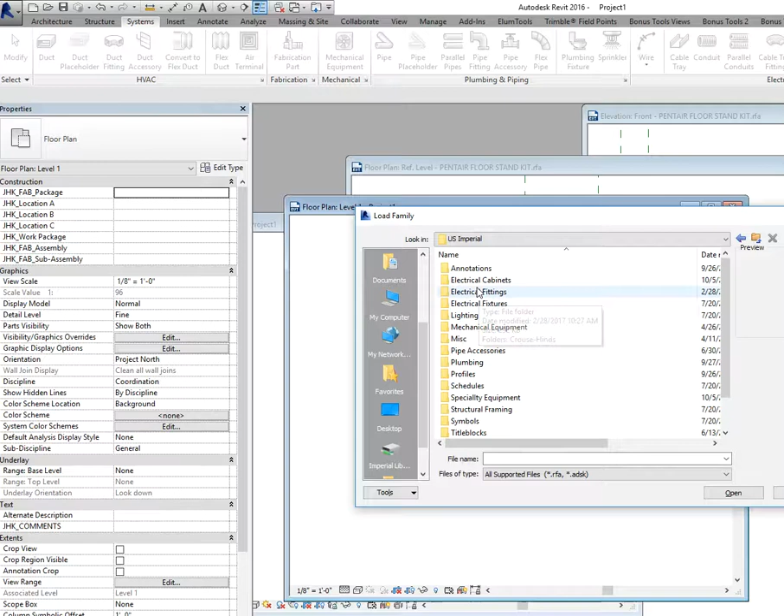First thing we want to do is load them in. They're both going to be under electrical cabinets, Pentair in this example, and we're going to load each one at a time. You have to make sure you use Load Family on these. These are type-based catalogs, so once they load, you can choose the actual cabinet size you want. I'm going to select all of them just for this instance. You can easily see the panel sizes located here, and the numbers are also in the part numbers themselves for the cabinets.

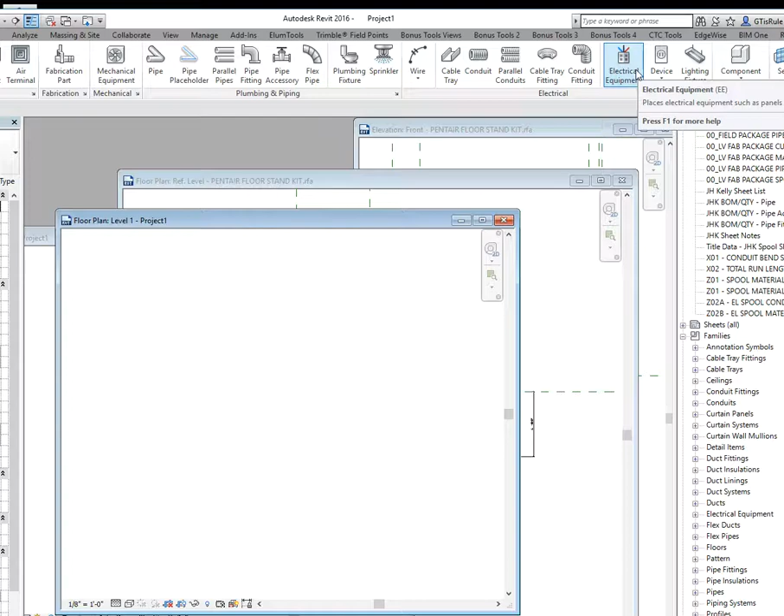And bring all those in. So now there's two ways that you can insert one of these in your project: the electrical equipment button or your standard place component button will work as well. I'm going to go ahead and just use the electrical equipment. I selected all of our sizes so we get the full entire range in, and I'm just going to drop one on the screen.

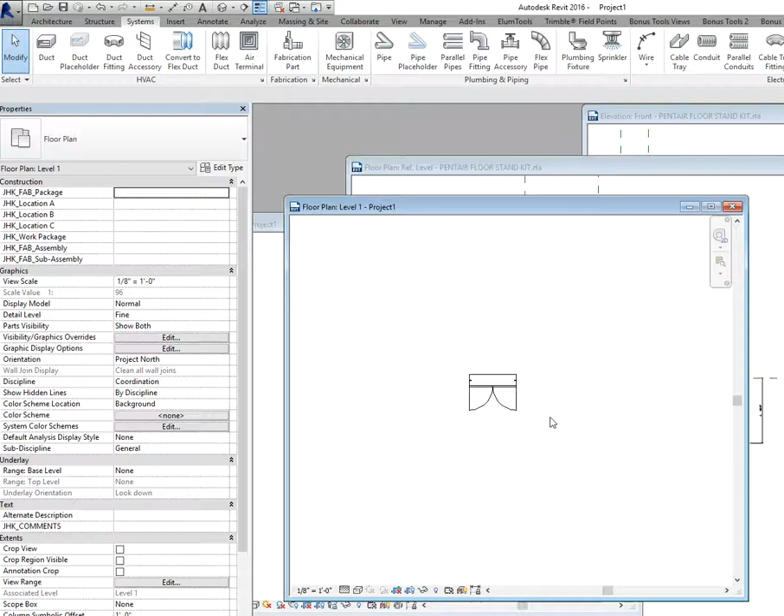So now if we take a section through this guy, flip that up, flip it open, we can see our wonderful little Hoffman stand sitting here.

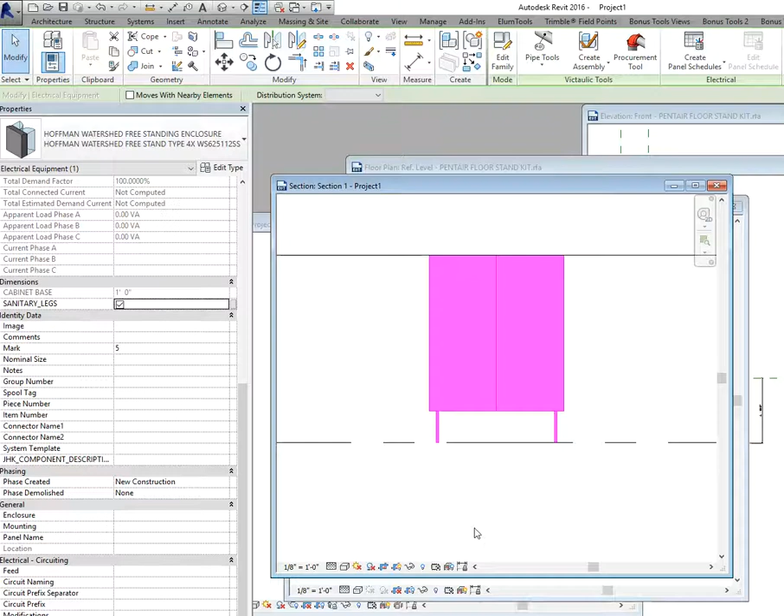One of the options on the properties palette for this is your sanitary legs. If you want sanitary legs, go ahead and check that on. That'll automatically bump your cabinet up 12 inches and account for the leg heights. The other thing is you will see on the properties palette the alternate description will also include adjustable sanitary legs if they are checked on. If they are unchecked, the name will go away.

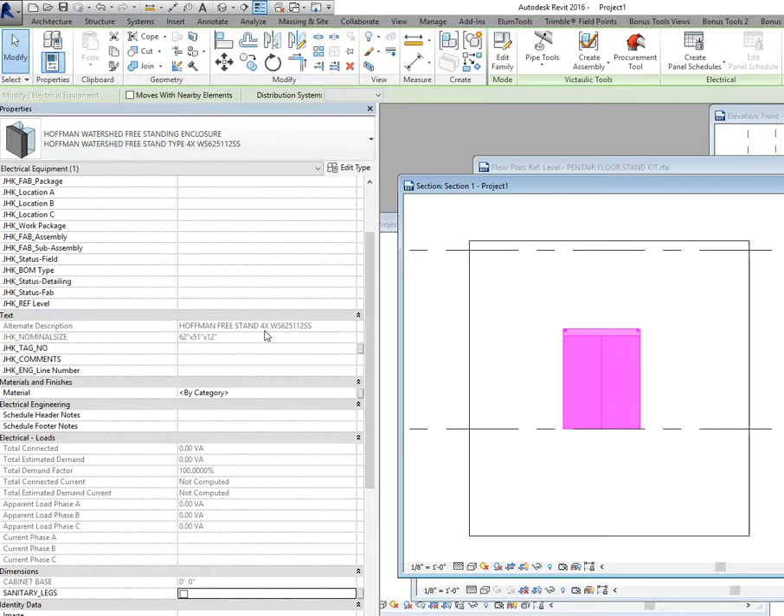So that's pretty much all there is to the stands. Of course you can type swap these to any size of cabinet. All the functionality is going to work the same.

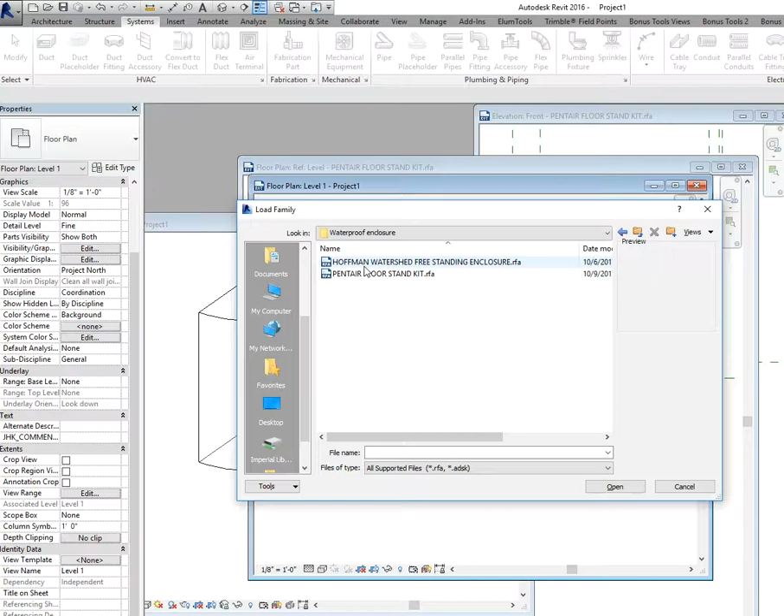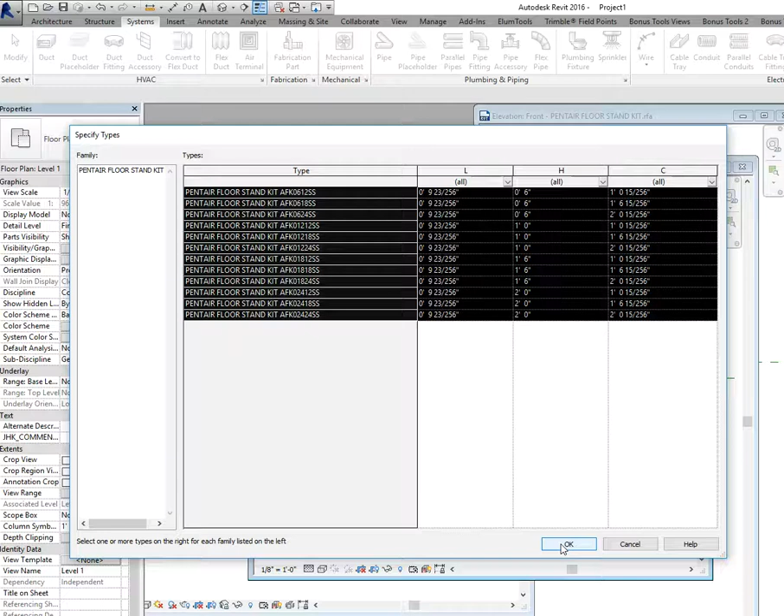Now when we're ready to use the freestanding leg kits, we're going to load family again. These have to be done with load family because of the type-based catalogs. Pentair floor stand kit, and again we get our pop-up dialog that includes all sizes. Now the main differences between these legs are literally the width, the height, and the depth of each foot independently. The kits are ordered in a package of 2, so the actual floor-to-floor center spread is based on the detailer.

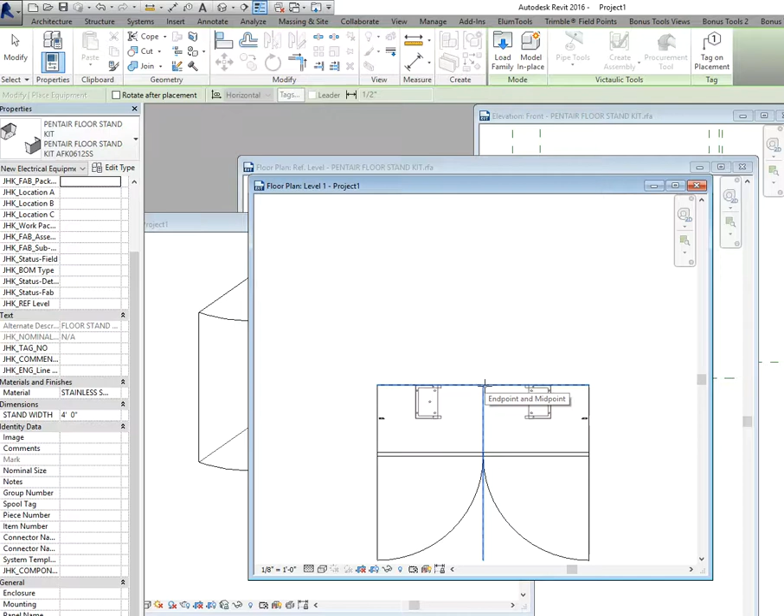So we've got all of these loaded in. They're going to be under the same category, electrical equipment. The way these get placed now is there's no relation to the family, but at least the insertion is the same, and the insertion is the back middle of the cabinet. Drop that in on there. Now if we go to our 3D view, we will see that these legs are nested inside the family.

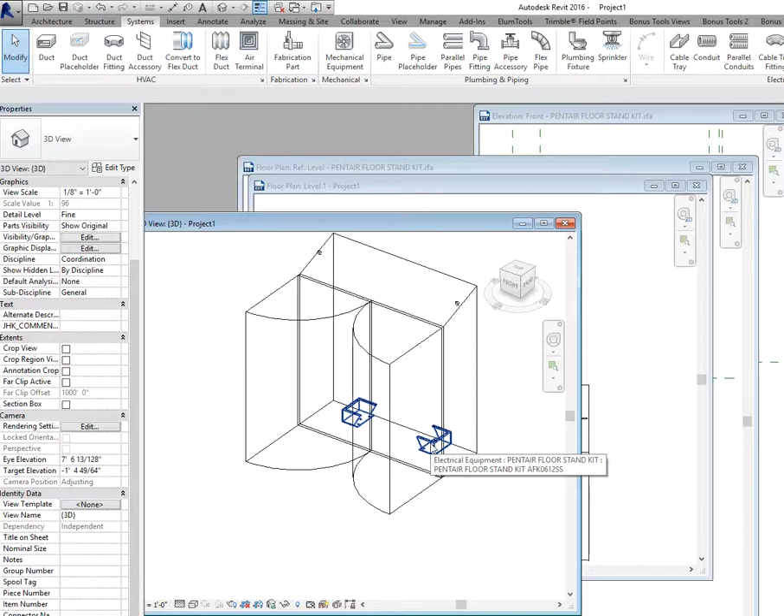I can't make, without having these hosted, a relation between the two. So what you want to do is take the depth of your stand, which the part number tells you: 0, 6, 12 - 12 is the width, 6 the height. You select the cabinet, and then you'll have to make that offset up yourself. Just offset the base of the cabinet up whatever distance you're looking for.

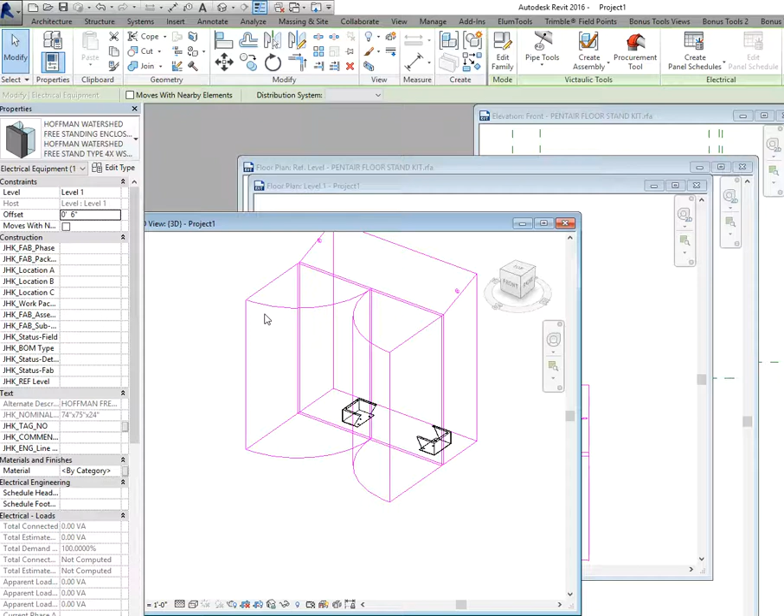Now at this point we need to match our cabinet dimensions. So this stand is obviously a bit too small, so we'll just pick the right one out of the drop down. I don't know which one it is off the top of my head.

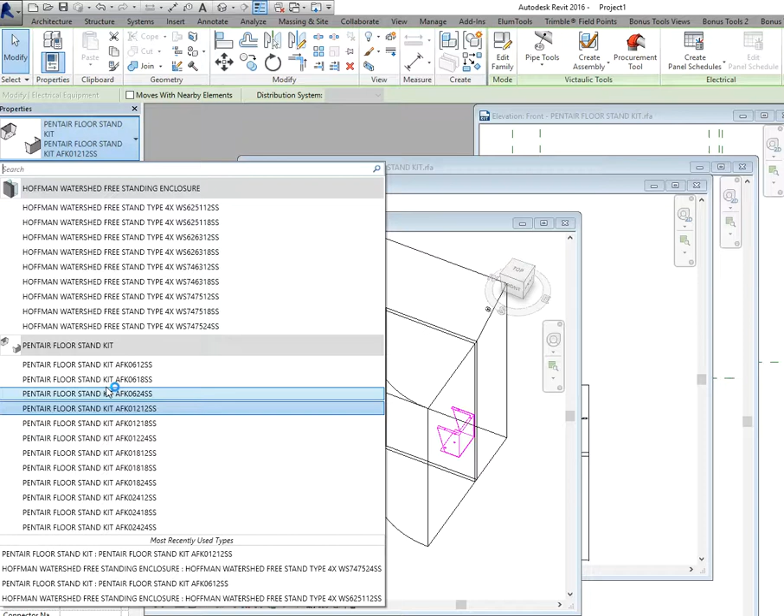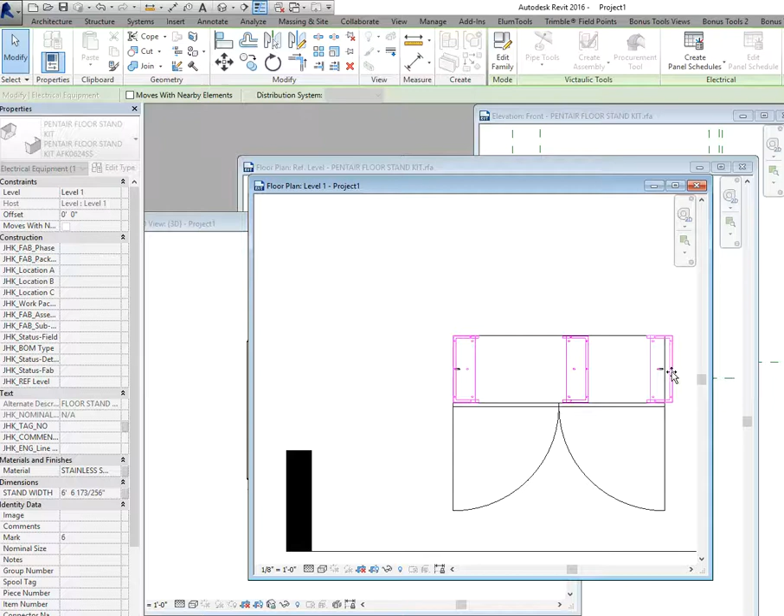There we go. And then on these sides, since they are user adjustable, just align these planes to the family. There we go. And once you make an applicable size range, the feet width is based off the cabinet width, you will get the proper description and the proper part number on the alternate description for these legs.

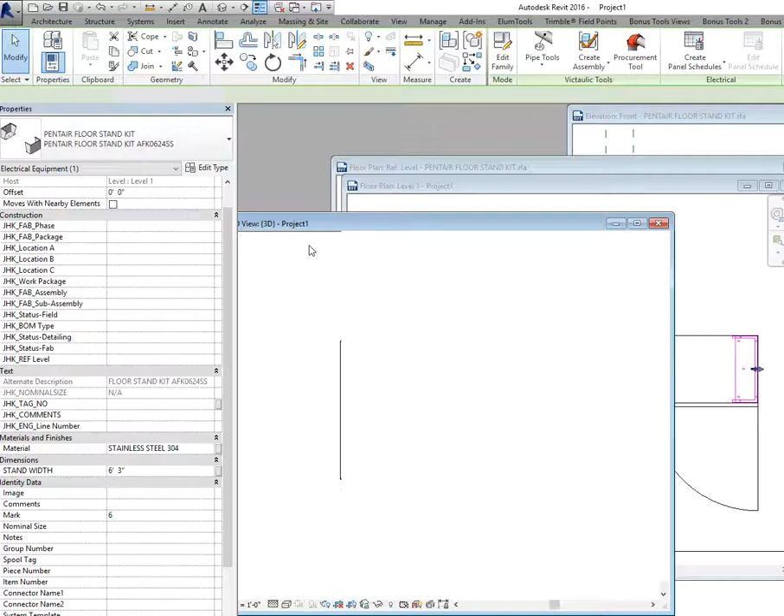And as you see with our 6-inch offset, say we need to go up to a 12-inch offset, we just swap the types of the legs. Look for a 12 by 24, and life is good. Our description's updated, it matches the correct scanned information. Should have everything we need on this guy. Internally, part numbers are being applied, so you've got an actual proper part number that we can schedule or do whatever we need to do with down in the future.